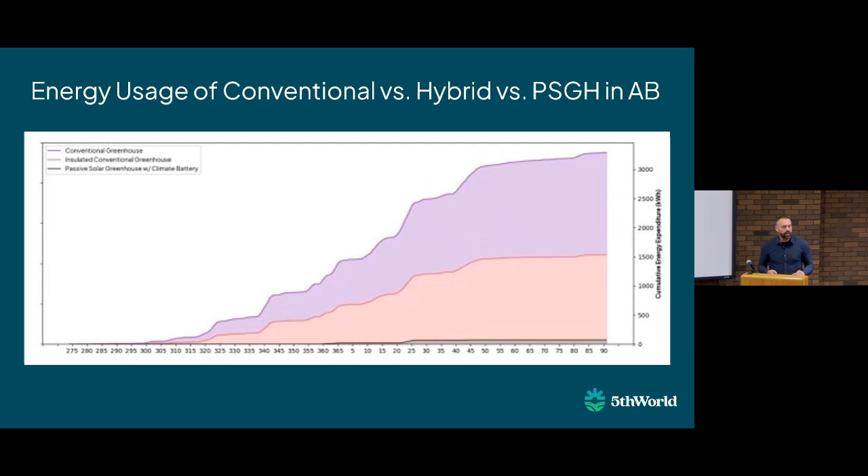So very similar to the passive house movement. Passive houses generally use 90% less energy than conventional houses or houses built without passive solar design thinking in it. Passive solar greenhouses have a similar performance curve. So, yeah, conventional greenhouses are actually amazing structures.

In fact, if you read the white paper that I've talked about, the Romans are actually one of the first inventors of the greenhouse. They were using sheets of silica, I think it was silica, as their glazing, because they didn't have glass back then, in order to try and grow citrus in places that it typically wouldn't grow. And so humans have been trying to manipulate our microclimates for a long time in order to gain an advantage with regards to food production. So there's a very long history of greenhouses within our culture.

And so something like this generally will cost less money and will take 100 growing days and extend it to 150. So you'll get another half of a growing season, maybe even 3/4 of a growing season before it's going to freeze at night. It all depends on how the year lines out. This greenhouse here cost my clients, I think it was $40,000 for the kit. And then there's a bunch of work, they really went all out with this concrete foundation, so it ended up costing quite a bit more, but it doesn't have to cost that much. You can do a lot to extend your vegetable garden just by using a structure similar to this.

Now, this is a cross section of a greenhouse that I'm working on right now. This one's going to go into North Dakota. There's a few things that make this structure different than this structure. Number one, and this will kind of answer your question, they have insulated walls on the north, east, and, sorry, that's the west side. You can't see the east side here. Where this greenhouse here has about an R value of 1.2, 1.5 on the glazing surface. Does everybody know what R value means? Anybody not know? Okay, the insulation value of a wall.

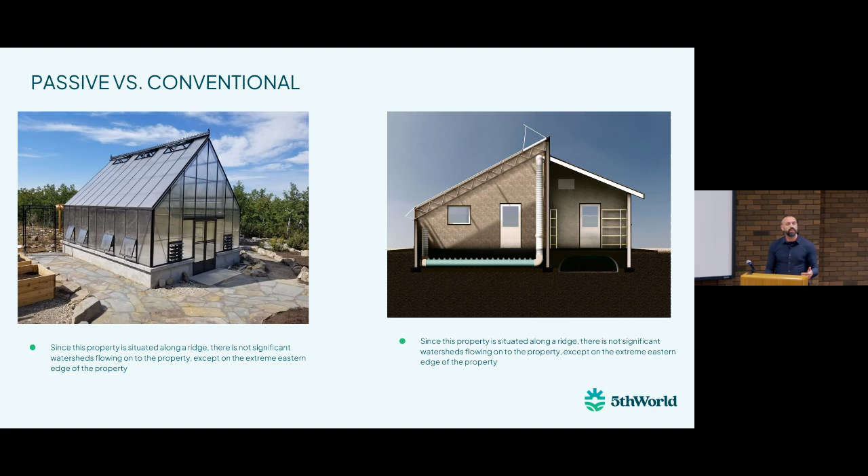And these climate batteries, you don't have to just use them in a passive solar greenhouse. You can use them in conventional greenhouses as well. And what it will do is it will increase that soil temperature, which increases the growing degree days in your greenhouse, which will get you red tomatoes earlier. That's what it actually means for the grower.

So the first thing we have to do with one of these structures is build a foundation. And so this looks like a giant bathtub. This is my backyard on my farm. And so we built a 4-foot ICF foundation. This is 20 by 40 feet long. And every 8 feet, we have a 10-foot deep pile going underneath this wall. So that's what gives our structure strength against the backfill. Because really what's going to happen with this greenhouse is we're going to fill it up with soil. There's no concrete foundation on the bottom of here. And so we have to make sure those walls are properly supported when we backfill on the outside.

We build these climate batteries out of conventional PVC pipe that you'd see in a city waterworks system. And then big O tubing, which is what you typically see around the outside of a building to make sure that it drains properly. And that's literally the whole climate battery. There's 2 rows of pipes. My greenhouse has about 34 big O pipes. And then I've got an automated system that basically tells the fan when to turn on and when to turn off in order to optimize thermal storage. So this is the foot or the foundation of the greenhouse.

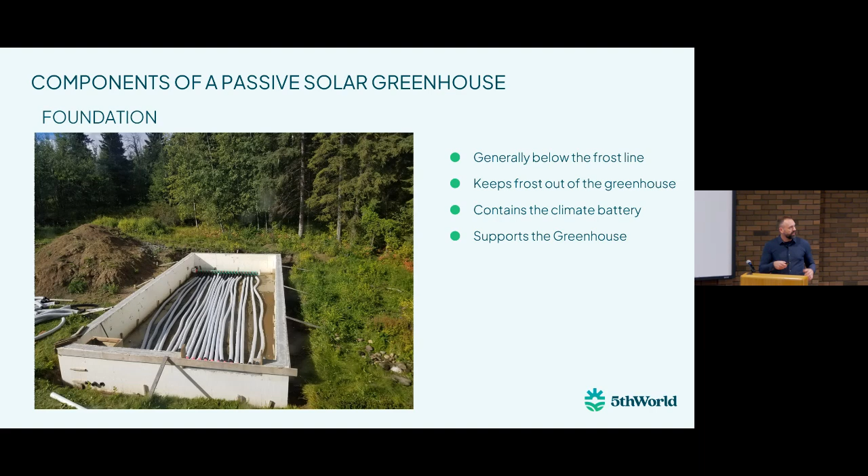Just to say that I don't believe that a passive solar greenhouse is a replacement for a garden. Okay, and so we were talking about this today too. Most greenhouses have about a 3-year honeymoon period before you want to get divorced from it. And that's because not only do you want a space in your backyard that replicates Mexico, but all those lovely bugs do too. And so after about 3 years, those bugs will start to normalize inside the greenhouse. And the solution is not herbicides or pesticides. The solution is to try and understand what's going on from an ecosystem perspective. And there are solutions to all of these problems, but every year you're going to find a new problem in your greenhouse that you're going to have to solve.

So 2 years ago, we had a lot of heat. We ended up being on vacation for a little bit, so we had a bit of water stress in the greenhouse, and our greenhouse exploded with powdery mildew. And we'd never seen powdery mildew this bad before. And so we lost most of our crop. And then last year we got it again, because once the powdery mildew is established, it's not going away. Turns out when you start talking to other greenhouse growers, the solution is raw milk. And so luckily one of my neighbors milks cows. We got some of that raw milk and we watered it down and sprayed all the plants, and the powdery mildew basically subsided. And so there's lots of solutions to these problems, but you will see problems in your greenhouse that you do not see in a conventional garden.

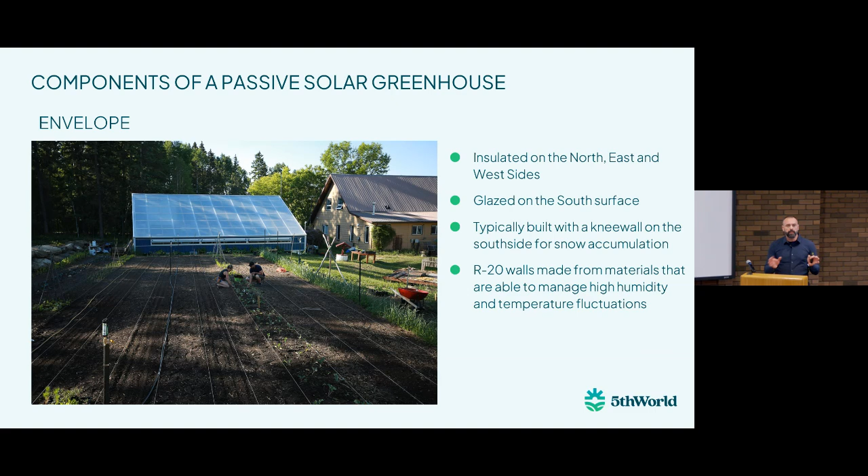Thinking about how you're going to accommodate for the snow coming off. And then, as I said, R20 is about the optimal R value for this climate, so you don't need to go much heavier on the insulation.

So one of the design constraints here was to be able to supply a year's supply of food for 20 people and store it inside of this greenhouse. We're currently growing tropicals in this greenhouse right now.

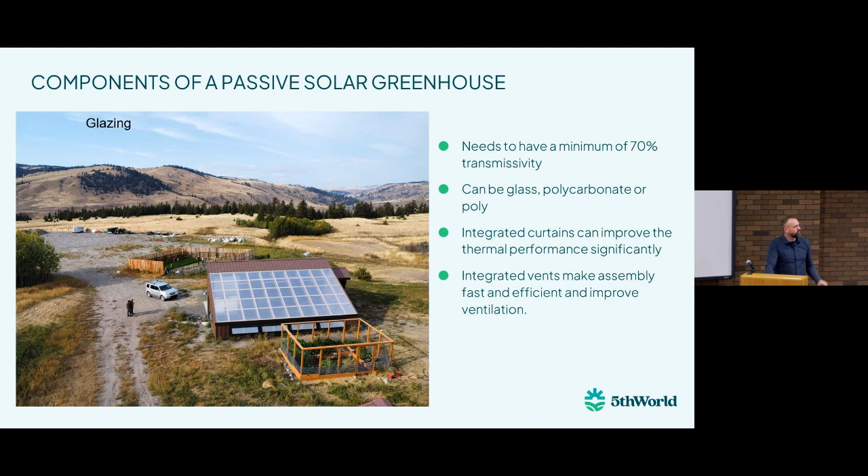And then the other thing that becomes a constraint is the tall wall in the back. So we have to be really careful about making these back walls too tall, and there's a bunch of things that we do to try and optimize for that. This is the inside of our greenhouse. I've learned the hard way, and you're going to see another big mistake that I made, but it's really important that we have reflective surfaces.

Most people don't know this, but the color white has about 3 or 4% less reflectivity than a mirror. So if a mirror is 99%, a white wall might be 96 or 95%. And so because we're reducing the aperture in here, we have to make sure that the surfaces inside are reflecting that light back around so that the plants have enough light to grow.

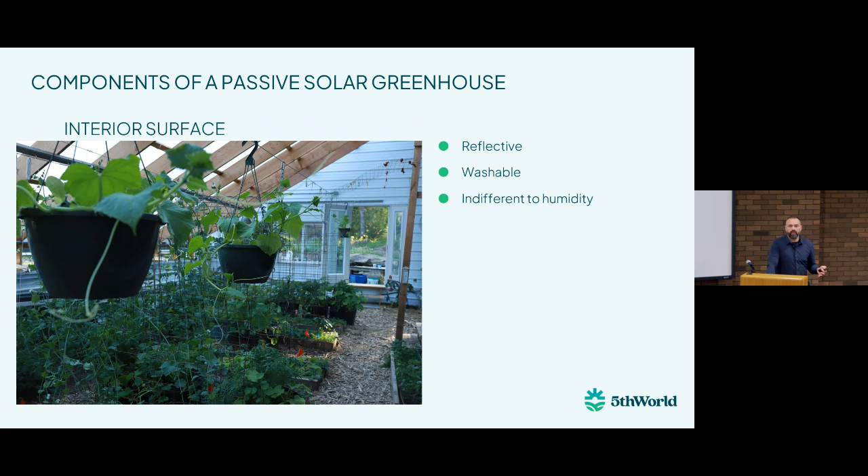And so we want reflective surfaces. We want them to be washable. That's why we use low rib tin. And we want the system to be indifferent to humidity because these structures can get very humid, especially when we get into the shoulder seasons.

So the solar wall works awesome. It heats up the soil really well. It's improved the performance of the climate battery dramatically. But black is not a good surface to grow your plants against.

And so now our greenhouses have a solar wall up top where the plants are not interfacing with the wall. And we're putting white tin down below, the 2/3 basically. So we still get the benefit of some solar thermal gain, but we also get the benefit of having that reflectivity in the greenhouse.

This is about a 300 or 400 watt fan, and it operates when the temperature goes above 21 to store energy, and it operates again when the temperature goes below 12 degrees Celsius to act as a heating system for the greenhouse.

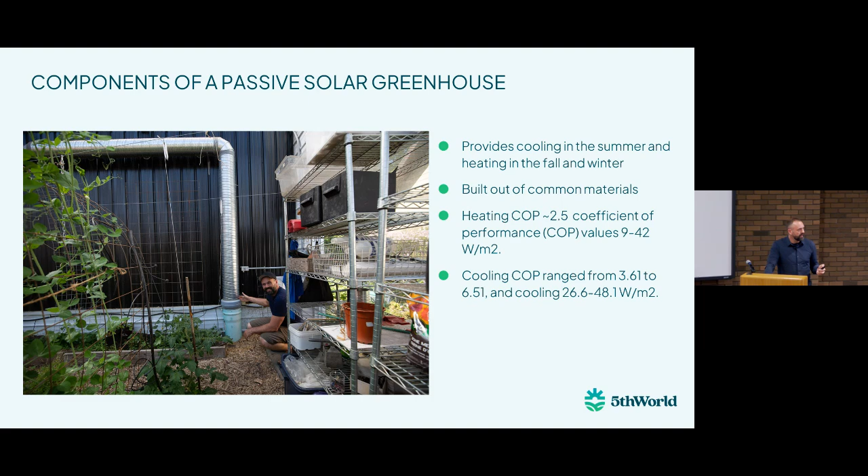However, as I said earlier, greenhouses always overheat. There's so much energy coming through this glazing surface. And so another innovation that we've developed in the last couple of years is the addition of a garage door. This is a really inexpensive insulated vent that you can put onto a greenhouse. We set up the logic for it so that when the temperature in the greenhouse goes above 30, the garage door will open. And when it drops below 20, it closes again.

If the user of the greenhouse wants to manually open it, he hits the button or she hits the button, a timer will get set off and it will pause the program for an hour so that they can use it for material handling. There's nothing worse than gardening when you can't get wheelbarrows or tractor buckets or large bulk material into a space.

And so this is a multifunctional element in that it's well insulated. It's better than the glazing. It's about R8, I think. And it provides a huge utilitarian purpose for us. So I can bring my tractor bucket straight in there and bring compost in. And as soon as this garage door opens, if I'm at 40 degrees inside the greenhouse, which is not uncommon, it'll drop right down to whatever the ambient air temperature is outside almost instantly.

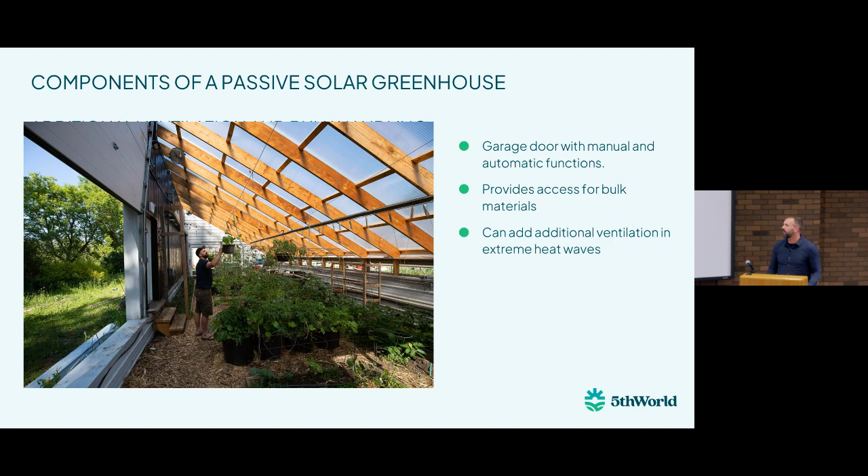There's a little bit of mucking about to get a garage door to do this. They're not really designed to be programmed for heat. And so you have to play with them a little bit to get them to do what you want them to do, but it can be done.

So that's the same greenhouse I just talked about, the one in Morningside. The kitchen is right here. There's one root cellar behind the kitchen and then 2 underground. I don't have any pictures of that with me right now. This is designed to be a 4-season greenhouse. And this property ended up getting 2 greenhouses, which I'll show you in a second.

So I was lying, I forgot, I just built this slide deck before I came. So I have a bad memory, I guess.

And then this is the cold storage room right here that is fed by earth tubes. Now, these earth tubes are kind of cool. They go 100 feet under, 100 feet to the north. They're below the frost line, and we bring air in. And so during the winter time, if it's really cold outside, the air for the root cellar goes underground and gets preheated to ground temperature.

Meanwhile, the ground is freezing because we're bringing all this cold air there. So we're actually storing ice. Our forefathers would have been going to lakes and pulling blocks of ice out of the lake. With plastics now, we can actually bring those blocks underground without having to go to the lake and haul that ice out. And so we're pre-charging the ground with cold by doing this. And the air then gets slowly blown into this root cellar right here, so that root cellar takes on the temperature of whatever's coming out of these earth tubes.

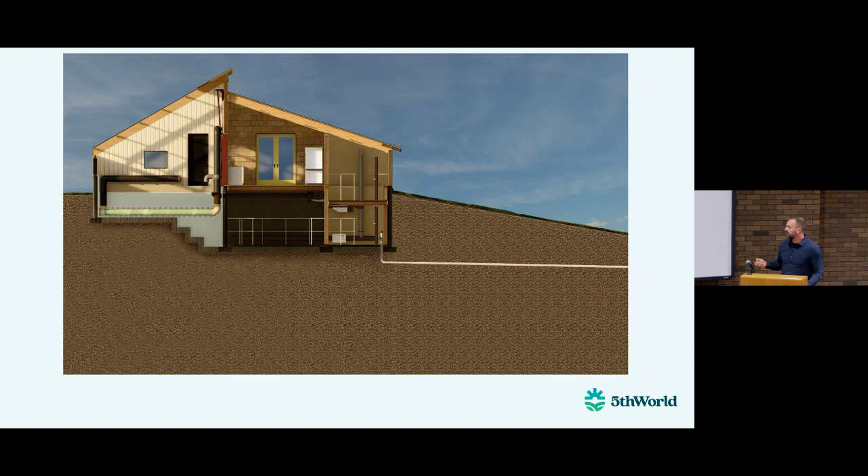The air from this root cellar has plant food, CO2, and so we pressurize this room and we inject it up into the greenhouse so that the plants can consume the food from the CO2 that's coming off of the vegetables. And that little bit of air actually has a tiny bit of energy that we can use. The other thing that the greenhouse has is a heat recovery ventilator. So we pull out humid air from the kitchen as we're cooking, and we inject the waste air into the greenhouse as well to benefit the plants.

This is version 5. So I've built 5 different versions of greenhouses over the last 15 years. I've learned a ton. This greenhouse is made out of a structurally insulated panel that gets made in Calgary. I chose this panel because it's got no organic material in it, so nothing can rot. It's basically magnesium oxide, expanded polystyrene, and magnesium oxide with pressure-treated splines to keep all the panels together. We've designed our own truss system with integrated vents.

And so that's what those are right there. Those are galvanized trusses. They have integrated curtains in them. As soon as the sun goes down at night, we can move thermal curtains across the trusses, but the curtains only go from one truss to another truss. They don't go across the whole system, so that we can still trellis tomatoes and other plants up into the trusses. So we can use the trusses as a trellising system and still get the benefit of a thermal curtain. And so this has made venting the greenhouse way more effective.

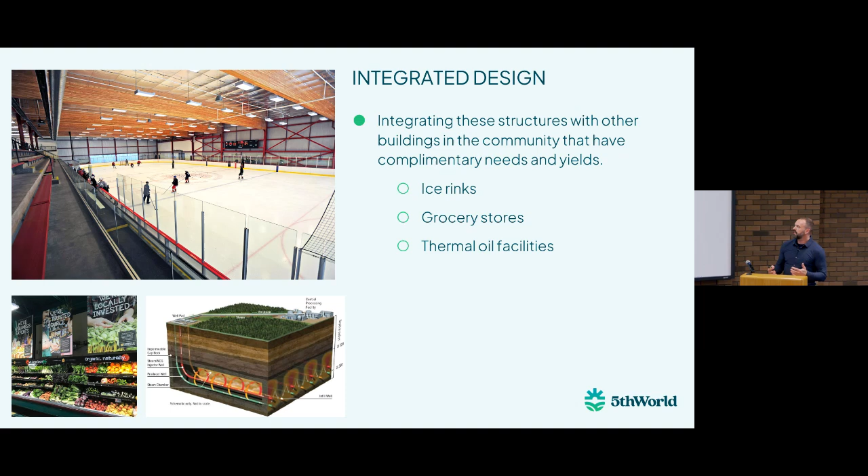And grocery stores are a bit of a hub too. And so I think it's really important, like the placement of these structures is really important because they can do more than just grow food.

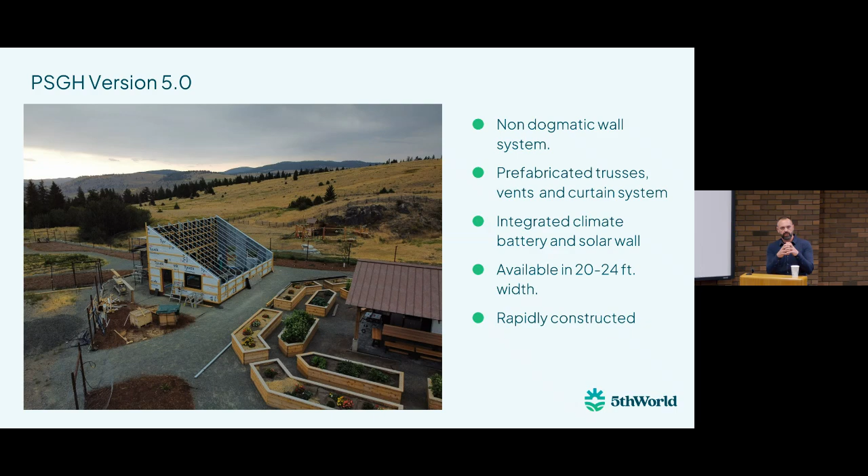Anyways, he puts these melon-sized cobbles underneath his garden bed, and he runs the air past them. So he doesn't have any of the manifold stuff I talk about here. And spherical cobbles are really interesting because they have a really high volume to surface area ratio. So they take a long time to heat up, but then they also take a long time to cool down. And if you get the cobble size right, the space between the rocks is sufficient to allow air to kind of migrate through.

You can now get the whole mass heated up. And so it's a more efficient way of storing that thermal energy. I don't know how much more. When we get into greenhouses that are hundreds or thousands of square feet big, the thought of having to haul in that much cobble seems irresponsible, especially when we've got all this native material.

The big thing that I emphasize when I'm constructing these things, because I actually will be out there building them with these folks, I don't like using gumbo clay. Not because it doesn't store heat, but you can imagine trying to squeeze the gumbo clay in between all those weeping tiles. It's a disaster. So free-flowing soils, typically subsoils, are best from a constructability perspective. You can even use topsoil, like black dirt. And so we'll put 4 feet of black topsoil into a greenhouse.

In Kamloops, we don't have a lot of soil like we have out in Alberta. And so we actually use the silty subsoil that they have there, which goes around the pipes really nicely. He showed up with a couple dump trucks full of soil, and it's like, this isn't topsoil. What is this? This is subsoil. Like, no, this is the best topsoil we have in the valley. And it's like, well, we can't use this the way it is. Luckily, there's a ranch just down the road.

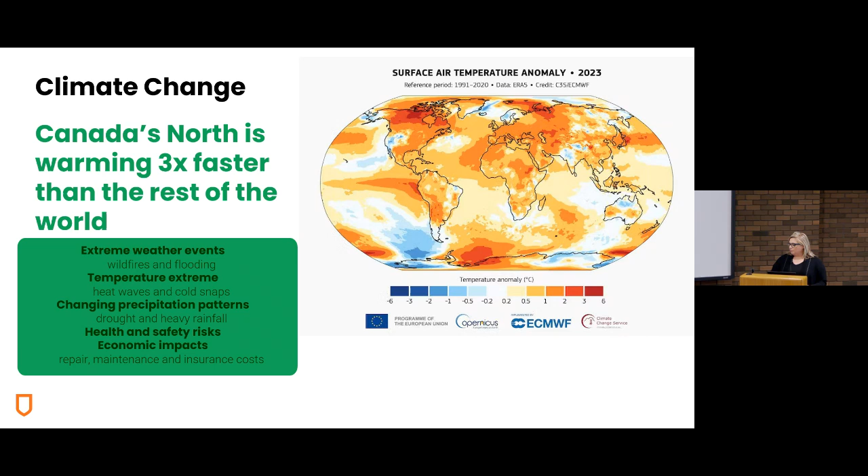But ultimately, thinking about all of this, we also need to touch upon climate change. And what's really concerning is that Canada's north is warming 3 times faster than the rest of the world because of climate change. So the impact of the whole world is really being felt in northern communities. And we actually heard that today. We had a brief session earlier, and we heard that even just a slight change in the temperature, an unexpected heat wave, could really impact the growing for months to come. And a lot of that is due to climate change, the rapid changing of our climate and environment. So we can become models not only for our own country, but for the rest of the world.

So when we think of a regenerative framework, we think about 7 principles, and we developed this in the Center for Architecture, and I've adapted it to the passive solar greenhouse thinking. So cooperative and collaborative planning, this is key in how we approach any building. We need to work as a community, and we need to work together to understand the needs. So community-led design, and this is going to be part of the next steps of the project, and that's why I'm bringing it up today. But it's also about co-creation and skills building. Being trained in community-led processes can then allow communities to take that and go with it on their own to develop other types of buildings.

Shared governance and stewardship. So, supporting cooperative models and thinking maybe differently about our economic and business systems. And then how do we scale and share the knowledge, right? It's not about someone being a keeper, not about the consultant that knows it all, but it's about how we share that knowledge so that it empowers communities moving forward. And that's what we're doing in a lot of our research projects.

So the second principle is discover and respect cultural and social diversities and opportunities. So again, thinking about sharing and learning from traditional practices. Passive design is not a new thing. This is how buildings were designed many years ago, but we've forgotten that. And now we have to come back to thinking about orienting a building towards the right position of the sun, thinking about how to capture air, to move air through. How do we capture daylight? But it's also about social equity and adapting to specific contexts. And I think that's really important.

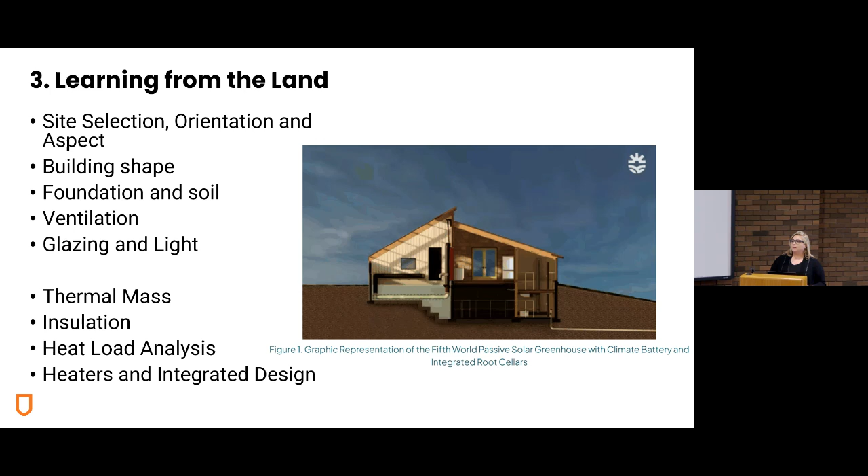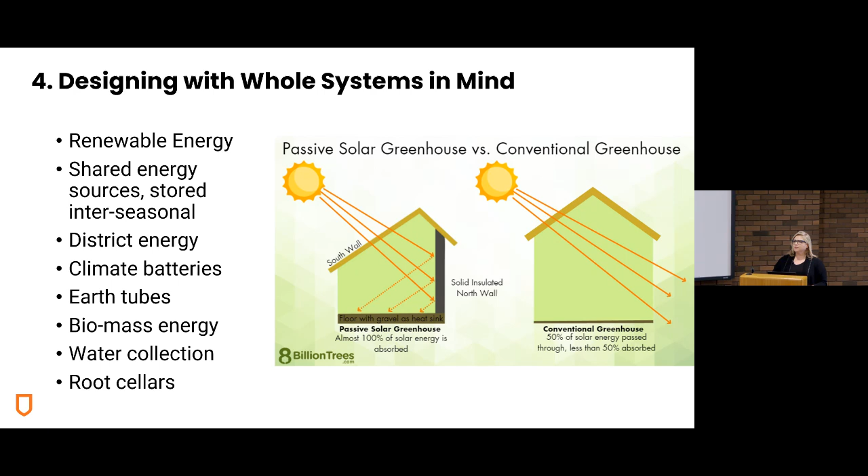Because I think if we can move away from materials with high carbon, we can start to create more circular cycles where the building itself works like the greenhouse, where it's a living organism. And then designing with whole systems, and Rob talked about this as well, thinking about the renewable energy, and can you use heat sources from other buildings in the community, considering district energy, earth tubes and biomass, water collection. So this is kind of like a takeaway list for reference.

So it's again thinking about that whole system where it doesn't necessarily need to be a mechanical system, but it can be a natural system that feeds back. And then it's also a water reserve that could irrigate the greenhouse as well.

So the fifth principle is minimizing waste, maximizing circularity. And this has to do with materials. So thinking about the durability and recyclability of materials, which I'll talk a little bit more about in another section when I talk about bioregional materials.

And I think it's really important that we think about where our materials come from and the transportation of materials, how they're extracted. Each process has an energy and carbon intensity. And we need to find those kinds of sources that are low so that we can continue to address issues of climate change. And then biodiversity and ecosystems, so designing for seasonal changes and thinking about resiliency, as I mentioned.

And then ultimately, the seventh principle is resiliency in itself. So building redundancy into systems. Rob talked about the redundancy of the lights, but what other kinds of redundancies in systems can we build? And again, it's about this idea of future-proofing, which is about thinking about the future as well. Can we create a system that allows it to adapt over time?

And so this is just a little summary, which I'll leave for when the slides are distributed.

But moving into the idea of bioregional materials. Bioregional materials are locally sourced, locally processed, specific to the geographic region. Canada is in a position where we have such a wealth of resources and materials, and I think we're starting to come back to understanding how we can benefit from that in our own country.

As I mentioned, not only is it locally sourced, but it's ecologically appropriate. So thinking about the natural environment and the climatic conditions in which it's not only harvested, but then used. Culturally relevant, so reflecting traditional and indigenous building practices and knowledge. That's an important consideration.

Low carbon and renewable. Natural materials such as timber, stone, clay, straw, and other plant-based biomaterials often have lower extraction processes that are lower in carbon, and because they're natural, they also store carbon in their fibers. So that's kind of a biogenic carbon discussion.

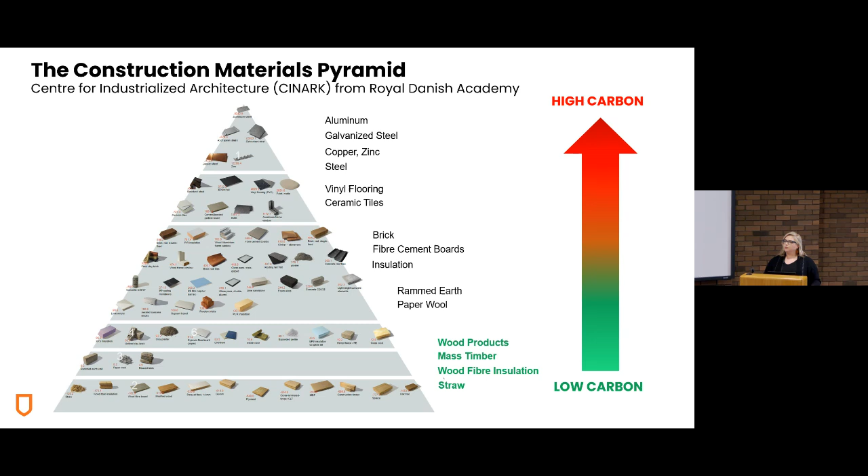Then you have your synthetic vinyls and ceramics, bricks, as you're moving down to low carbon, more natural materials. Then you move into rammed earth and wood products, straw, and other types of biomaterials. So we want to try to use what's at the bottom, knowing that there are parts like concrete we can't really get away from. Steel, often we can't get away from in certain conditions. We want to balance it just like we balance our diet.

And this is a great resource. I just wanted to share the link; you can go into each of the materials and it can tell you more about the specific properties and how they're manufactured.

When we think about potential materials for a greenhouse, there are a lot of opportunities. We can think of wood for the structure and its frame, straw bale for the thermal properties, rammed earth, again, for thermal properties. And something we were speaking about earlier is hempcrete. That's a newer product made of hemp, a natural material, and it also has thermal capacity for storing heat and then releasing it over time.

So wood, for example, has good thermal performance and insulation. It adapts with its environment. It's a living material, it absorbs, it releases, and it can be locally sourced. But you need to consider, especially in a greenhouse, the moisture and how to treat it. A well-ventilated greenhouse is important because you don't want moisture to stay too long on the wood or else it'll start to form mildew.

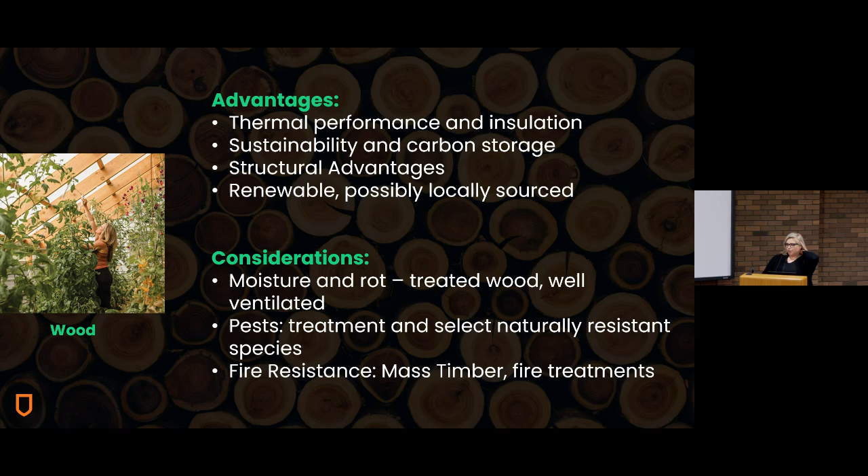And then you also want to think about pests. One thing to think about is the type of wood that you use. Wood that is naturally resistant to pests is a good option. But there are also treatments, including natural treatments, that you can put on wood to protect it from insects and pests.

The next one that I'm interested in, because I was exposed to straw bale when I was studying architecture in Halifax, which is a very moist climate. It rains a lot there. But it's a traditional building technique that I learned from the Acadian community in New Brunswick and northern Nova Scotia, where they used straw bale and thatched roofs to build their buildings. And the straw bale is working very well.

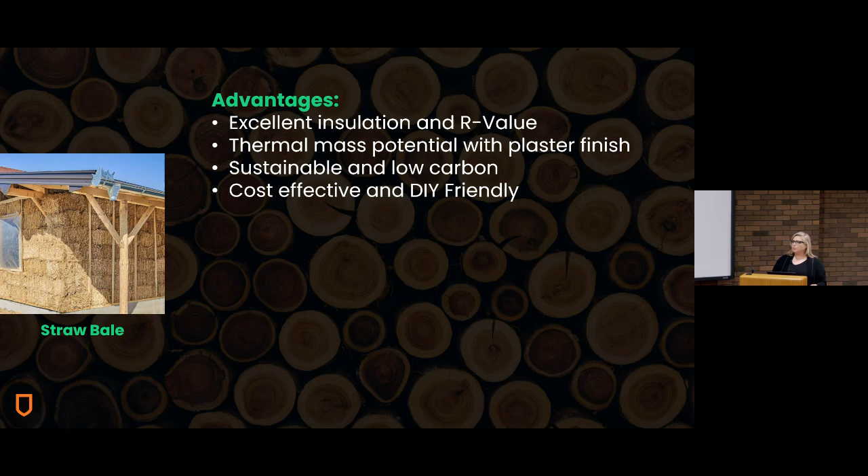It could have great thermal mass potential, but you have to be very careful about how the compression of the bale is done so that it can be fire resistant as well as moisture resistant. And then you often have to line it with a lime and cob mud structure on the outside to protect it like a plaster. But again, we talked about this too, rodent attraction. So you want to design it to prevent rodents from finding their way in, because then they'll never leave the straw bale.

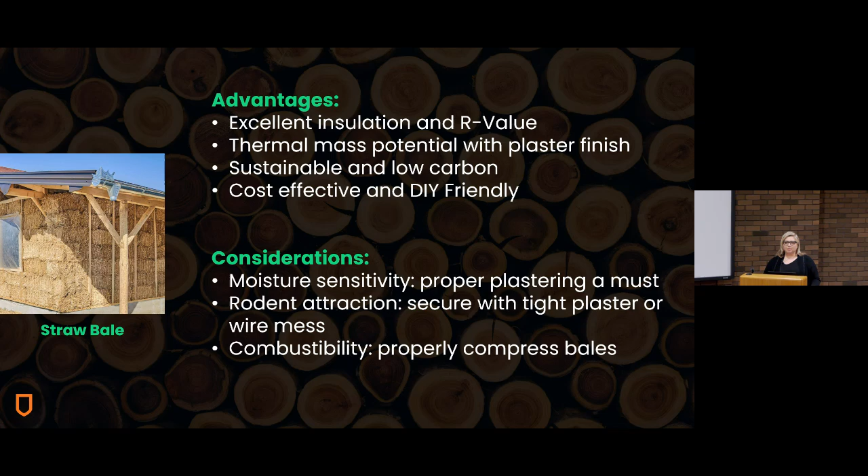And then again, combustibility, it's really about making sure the bales are compressed. And I think this could be quite interesting because we can produce these locally in communities and they could be the thermal wall that absorbs the heat and releases it over time. And I think, Rob, you were involved in a straw bale greenhouse as well.

So the next and last section is about the participatory design component, sharing a little bit about what's to come in the community input and process and next steps. Participatory design is really a collaborative design approach that actively involves stakeholders. It's about improving usability and functionality, making sure it's designed for the communities rather than having someone come in and tell you what you should have. Enhance social equity and inclusion.

We find that when community is involved in the development of buildings, they care for the buildings and they're invested in the buildings. And that's that sense of ownership and then community resilience to maintain it over time. And again, it encourages sustainable and regenerative practices. We can talk about sustainability and regenerative practices to help put those ideas forward. And then it reduces risk and conflict.

Ultimately, we all are going to have different needs and desires, but if we can have a consensus on what the buildings need together, then it's consensus building. And it supports innovation and co-creation, and it's an opportunity for skill sharing. So I wanted to share this slide. This was an image from, and that's one of our students at Athabasca University, when we went to Lesotho last year, and we were there in 2023 as well.

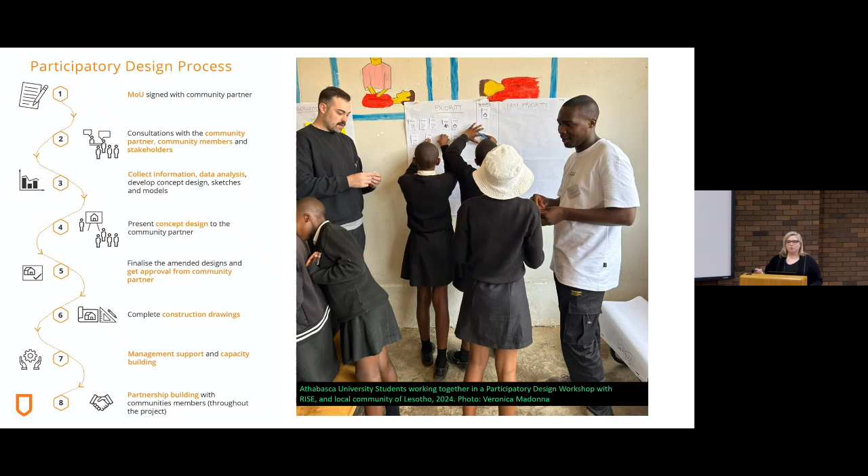Mutual understanding and respect. We might not all agree with each other, but we want to have mutual respect to allow people to share their opinions. Creating inclusive solutions that we've developed together, and ultimately creating a shared responsibility system as the result of that. And so some activities, and of course they get tailored depending on the design objective: we can talk about problems and solutions, daily routines, priorities.

Participatory mapping. We found one of the most effective exercises is to give everyone a pencil and a piece of paper and actually draw out what you would imagine your greenhouse to look like and to have. And think about the quality of space.